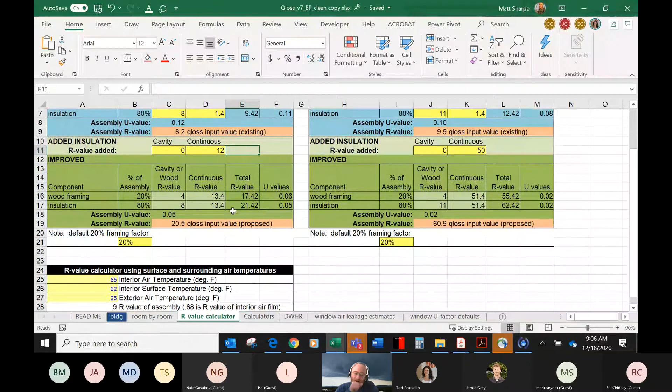Got it, okay, that's great. Thank you. Hey, welcome. I'll just show a couple other tabs here, and on this tab, if you scroll down a little bit...

Here's just a rough calculator to estimate R value of an assembly if you have temperatures. So if you have your IR camera and you're taking surface temperatures, and you have indoor air temperatures and outside air temperatures, you can make an attempt to calculate your R value. This again would bypass the need to calculate it with framing factors and studs and stuff, and just take numbers that you'd still have to average across the temperatures you're seeing. But this gives you some ability to take the guesswork out of it.

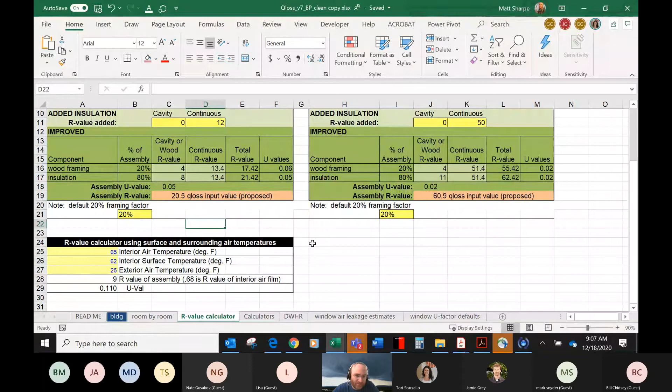Let's see, over more tabs, there is a calculator for doing some fuel usage review. So you have a delivery date and gallons delivered, and if you enter all of those over time, this gives you gallons per day. You start to see some things like base load times—like they might just be using hot water between June and October, so 1.3 gallons a day is your base load. You can pull that out so that you're only putting your heating usage in the heating section. That is important, especially when there is a lot of domestic hot water, a lot of base load usage. You do want to pull that out of your input up here. This is heating fuel usage data, so do that adjustment the best you can.

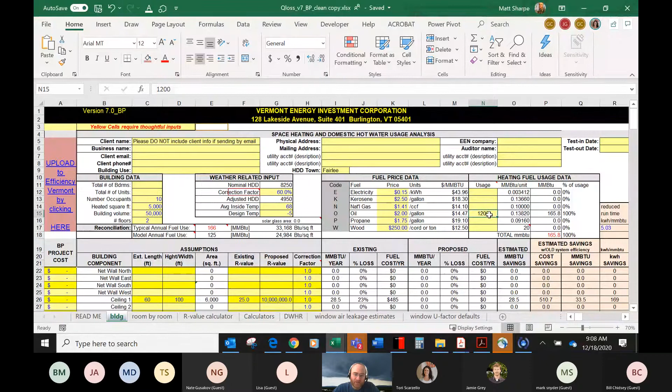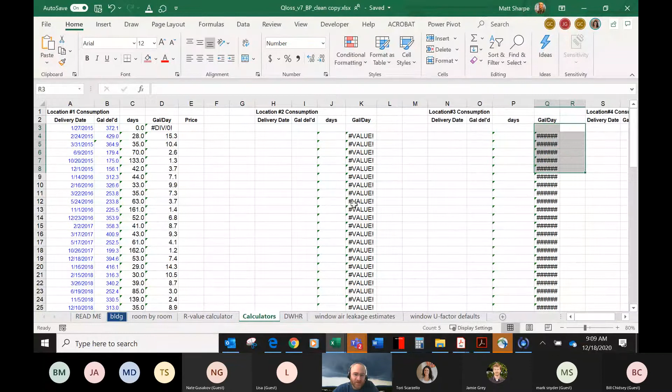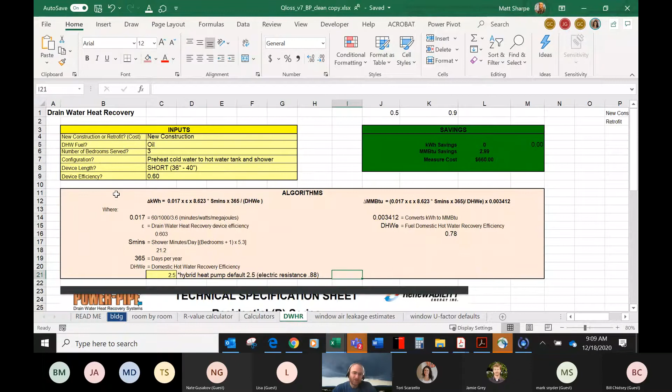There's another calculator for drain water heat recovery. I know it's hard to get these into retrofits, but if you have the opportunity, here's a quick and dirty way to estimate the savings available to do a drain water heat recovery unit. And here's just one example of a product and their efficiencies.

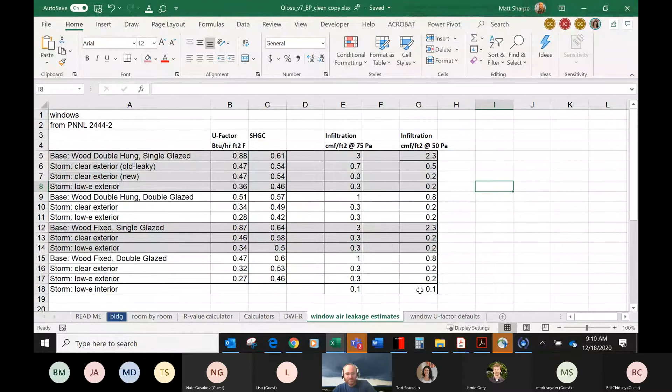These windows—if you're modeling the window, you could get some idea as to how leaky they are, and use that to gauge how tight you can actually get by doing attic and basement work, if you have really leaky windows. Then U-factor defaults. But really, I think most of your work is going to be, like Nate brought up, calculating your assembly R values, putting them in here, putting in your square footages for the work you're doing, and then trying to get a reasonable result and make adjustments as needed.

So for this project, we see we're at 26% of the usage with this improvement, which is a reasonable number for a good weatherization job. If we saw this creep up above 50%, we'd want to see a pretty comprehensive job laid out in the numbers over here. Didn't really talk about shielding, which is part of your air infiltration estimates—exposed, normal, or well shielded.

And then down here you have a place to put two fuel types. So if you have more than two, just use the predominant two and give a percent total and the efficiency of those systems. That efficiency number does impact the savings in the end.

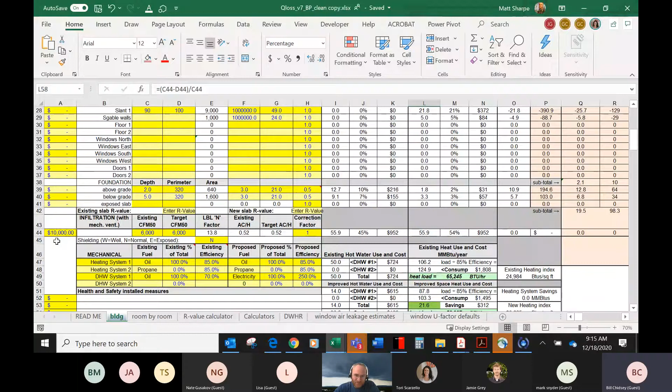Quick second question. Are some of these cells locked so you can't mistakenly erase the formula? Nope, you can totally mess with it. You can wipe it out pretty easy, huh?

You can, which is why I suggested right from the top, save a clean copy. Anytime you start a new project, start by save as, so you're always maintaining a clean copy that's unedited. And that's just the fail safe. I think, yeah, we could get into locking cells, but that oftentimes leads to some need to unlock them down the road at some point for somebody.

Thank you. I noticed that with Bruce Cortot. He sent me a copy of QLoss for his project, and I said, wow, there's quite a lot of formula in this cell. And I realized it wasn't locked.

Yeah, it probably would be a good idea to lock up things like these outcomes. The areas, you know, you don't have to use the length times width thing here. If you know the area, if you calculated them out outside of this, you can just hard write it right in. These lengths times widths don't do anything other than calculate an area.

I should mention this is net area that you want to be entering here. If you do have walls with windows in them, you can see the formula does remove the associated window. But if you don't use the formula and don't enter the windows, you have to enter the net wall area there. That can be an estimate. If you say 10% of that wall is a window, just back out 10%. We're just trying to get close here. If you wanted to be more detailed for your estimating, that's great.

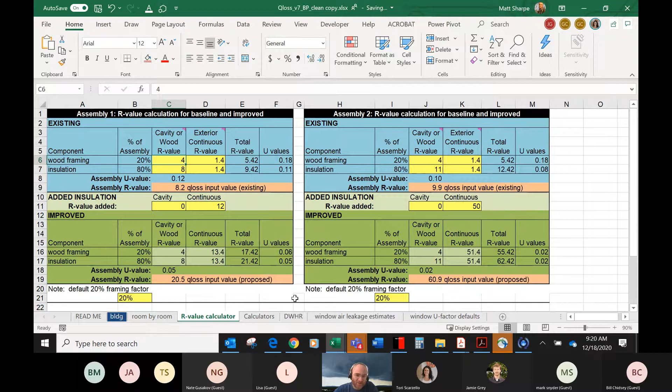Matt, we have a question from Lisa in the chat: if you could please share any other references to using QLoss, if any exist.

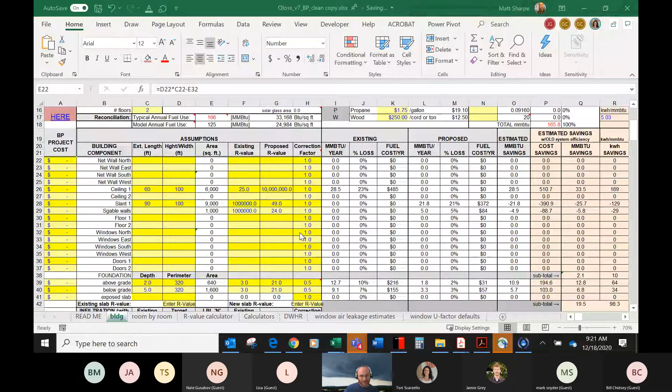What we can do is share this training. There's another recorded training that's up on the website now. Other than that, I think the references are energy savings algorithms, so I don't know if I have this book nearby. I don't know if you can see my screen, but it's Residential Energy by John Krigger, and this is a really accessible book and easy to follow. In the back is a great appendix, and the appendix has the energy estimates, or energy savings algorithms, that are used in QLoss. It also has the ventilation savings estimates that you could build out if you really wanted to dive into learning more about the analysis. But no, there's not like a manual to it. It's pretty grassroots, I guess you might say.

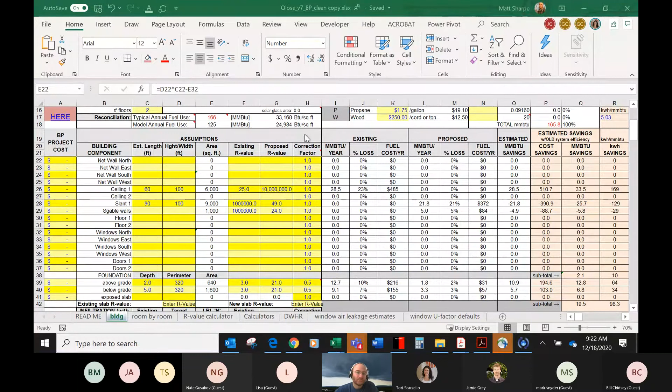This tool's been around for quite a while, as long as VEIC pretty much, which I don't know what that number is now, like 35, 40, maybe 40 years. There's a little README bit in it that's sort of almost like a buyer-beware type of note. Use it at your own risk. What you enter for numbers is going to impact what the results say, so be educated in how you choose the numbers you enter.

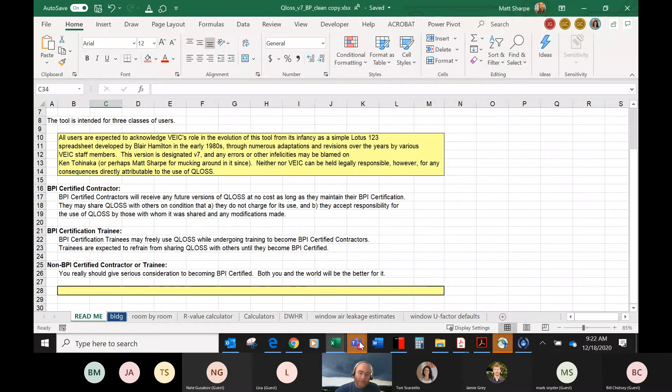So another reminder: save your file before you're done, click the upload to Efficiency Vermont button, and then attach the QLoss and the invoice from the job, and that will get uploaded directly to us. Please do not email this. If you're having trouble with that link for whatever reason, give us a call. We really can't send customer information across email attachments, we're not allowed, it's a security and customer confidentiality concern.

So if for some reason you do need to email it, what you could do is delete all the customer information, give us a call, and tell us what that is. That would be the workaround, but try to use the upload button, it should be pretty straightforward.

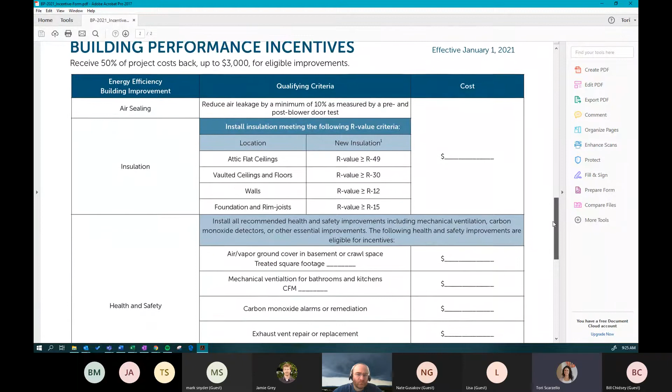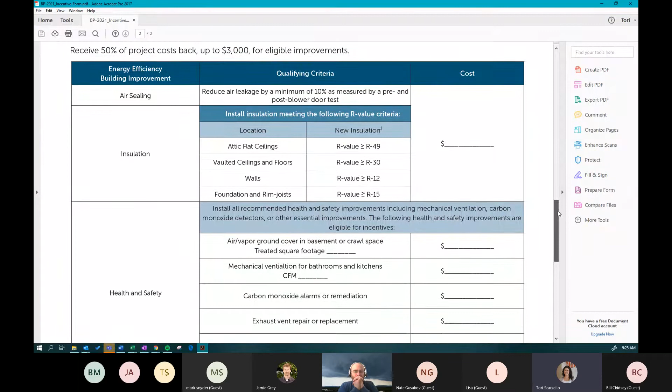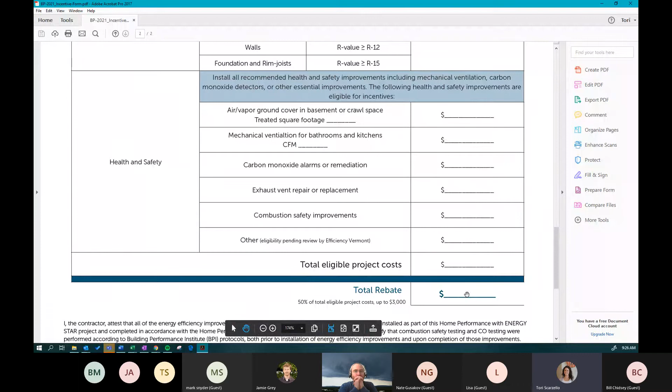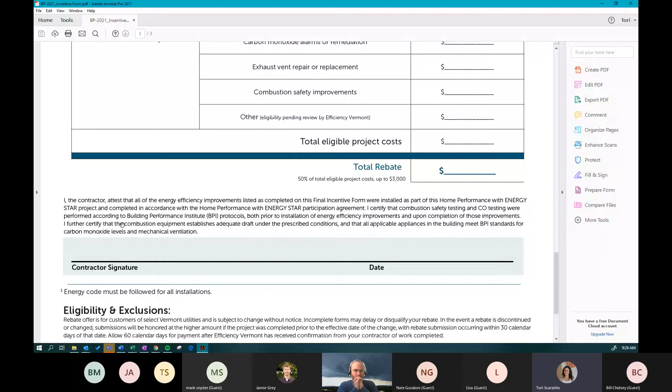The back of the form, this table should look pretty familiar to folks. It's the same building performance table with the minimum air sealing and insulation requirements. The main difference here is we have this column for costs, which you will have entered in QLoss. We add them to this form so the customer can understand the eligible costs for the rebate and their final rebate amount. This is a way to communicate back to the customer their final rebate amount, and here's the section where you, the contractor, will sign. So that's it, pretty basic front and back.

I've dropped it in the chat as well for reference. And like Matt said, this will be sent via DocuSign, another secure document sharing tool, so keep an eye out for that on projects you'll be completing.

Tori, I have a quick question on that. Sure. Notice where the contractor signs off, it references Home Performance with Energy Star instead of Building Performance. Is that just a typo, I imagine? Right, they're two separate things. Yep, good catch. This is the same statement as the Home Performance language, so yeah, great call. We will update that for clarification. Cool, thanks. Thank you.

Junio just mentioned the link was not allowed, the enrollment form link did not work for him. So I can do that again. Oh, I can also maybe you can change the permissions, Tori. Sure, yeah, I think I had just -- let me see if, rather than sharing a link, I'm trying to just drop the file into the chat. Yeah, I just added a link myself. I think that should work.